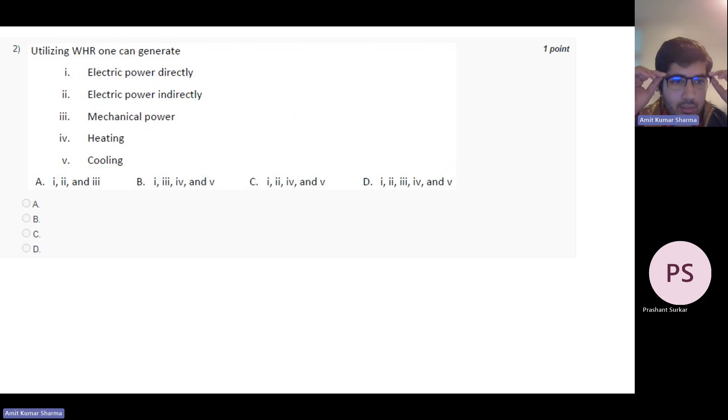Now, utilizing waste heat recovery one can generate - if you are having a waste heat recovery system, we can directly get electric power, or indirectly mechanical power, heating and cooling. So we can do multiple things. For this, first you have to identify what kind of plant you are having and what are the points.

These are like waste streams available - what is the temperature, pressure, and condition, and what will be the effect if you are tapping off some waste heat recovery there, then what will be the effect of that stream on the other process also. So everything you have to analyze, but you can recover all these: electric power, mechanical power, heating and cooling.

So which of the following are the reasons for waste heat generation? There are many: thermodynamic limitation of cycles, since we are limited by the Carnot cycle. Heat transfer limitations also exist. Physical limitations of the equipment like sizing, length, etc. Material properties also matter, so plant layout is important. Characteristics and chemical composition of the exhaust stream are also important, because you have to check if it has any toxic elements or not. These are the points you have to look into.

Which of the following are sources of waste heat? The sources are mainly fossil fuel and nuclear power plants, and hot products in metallurgical processes and chemical industries. Hydropower plant is completely renewable, so that is not a source of waste heat.

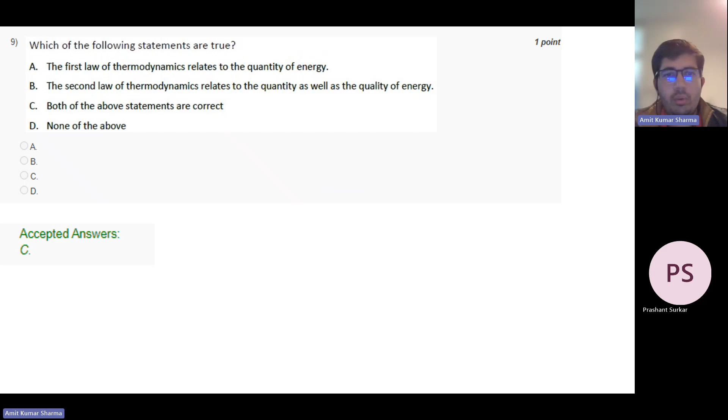In the second law, we talk about entropy, we talk about the quality of energy. Like if you're saying there is around 100 kilowatts of heat available, that heat will not actually generate 100 kilowatts of work. You have to see the exergy, how much of that heat will actually be able to generate work. So here we see the quality, because when you use that heat to generate actual work, due to entropy, most of it will be wasted. So maybe from 100 kilowatts you will only be able to get 20 kilowatts or even less, depending on many parameters like the process and so on.

So exergy is very important. If you want to find the efficiency of a plant, you should go for exergy efficiency, not energy efficiency, because exergy efficiency will tell you the exact details about the plant, since exergy destruction is very important. So try to find the exergy efficiency data for your plant, because energy efficiency will not give you the correct data. Exergy efficiency is very important.

So which of the following are corollaries of the second law of thermodynamics? The first, second, third, fourth, and fifth - all of them. The direction of the process, concept of irreversibility, concept of entropy, and all.

These kinds of numericals may also come in your exam.

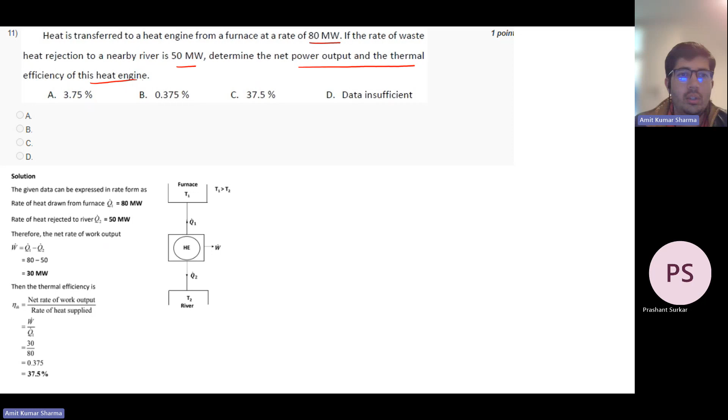So heat is transferred to a heat engine from a furnace at 80 megawatts. If the rate of waste heat rejection to a nearby river is 50 megawatts, determine the net power output and thermal efficiency of the heat engine. Whenever you find a numerical like this, the first thing you should do is try to draw a basic schematic. You can mention T1, T2, and the heat engine, and mark the heat flows and the work done. When you do this, I think you can remember what you have to do with the data. Sometimes it gets confusing, so try to always follow this approach.

Draw a basic schematic, mark all the points, mark all the temperatures, then apply the formulas. Here you can apply T1 for the furnace, T2 for the river, then heat engine developing some work. This is Q1, this is Q2, T1 is greater than T2. So the net rate of work output will be Q1 minus Q2. Q1 is given as 80 megawatt, Q2 is given as 50 megawatt, so 30 megawatt will be the work output. Efficiency is net work output upon rate of heat supplied, so W upon Q1 gives 37.5%. So in this way you can find the answer.

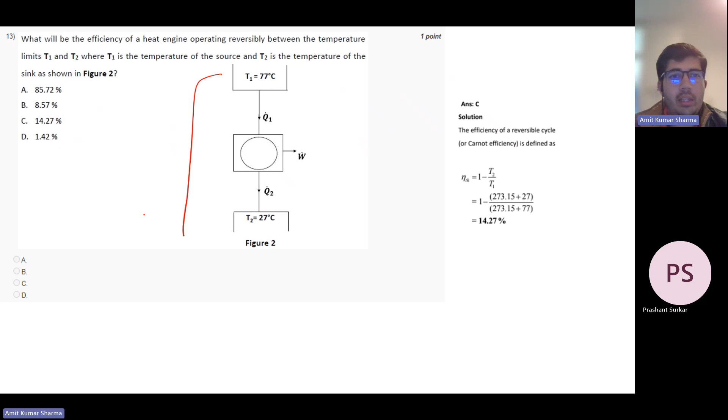This statement is very important: COP of heat pump is always greater than COP of refrigerator, it equals 1 plus COP of refrigerator. So COP of heat pump is desired effect upon work input. So the correct answer is all of the above.

Again a similar question, here we are given efficiency, and the important thing is whenever you have temperature in degree centigrade, when you apply this formula, always put the temperature in Kelvin. This is important, otherwise you will get the wrong answer. Just convert the temperature to Kelvin, then put it in the formula. Temperature should be in Kelvin.

So what are the possible causes of waste heat generation? The economy and energy policies, physical limitation, and minimum allowable temperature of cooling. These are the important points for waste heat generation.

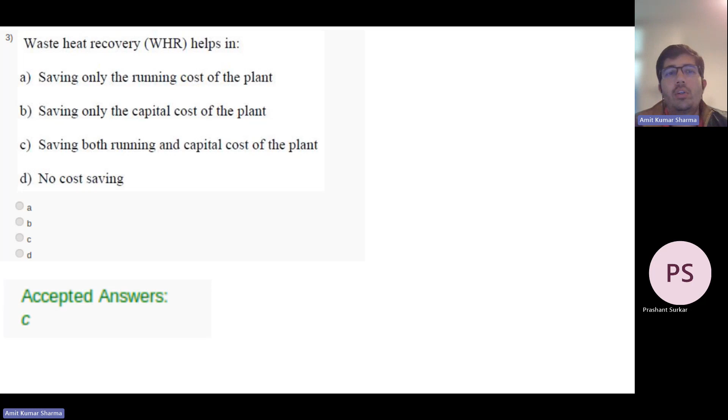Waste heat recovery helps in saving both running and capital cost of the plant. If your plant is already installed, it cannot change the capital cost, but running cost can be reduced in the long term. In the short term, you have to invest something to install a new system for waste heat recovery, but in the long term, there will be saving for sure.

For a cyclic process, the change of thermodynamic property is always zero.

Which one is the correct statement regarding waste heat recovery?

Both quality and quantity of waste heat are important, so you should know the quality and quantity. Quality means temperature, and also pressure. Quantity means the waste stream flow rate - what is the quantity of flow rate. The quality is the temperature. For example, if your waste stream is available at 800 degrees centigrade, and maybe the flow rate is low, but that is having more energy, so that is the quality actually.

To understand more about quality, I think you should cover exergy. There is a Moran Shapiro book, a good thermodynamics book, maybe you are aware of this book. So please try to cover the exergy chapter.

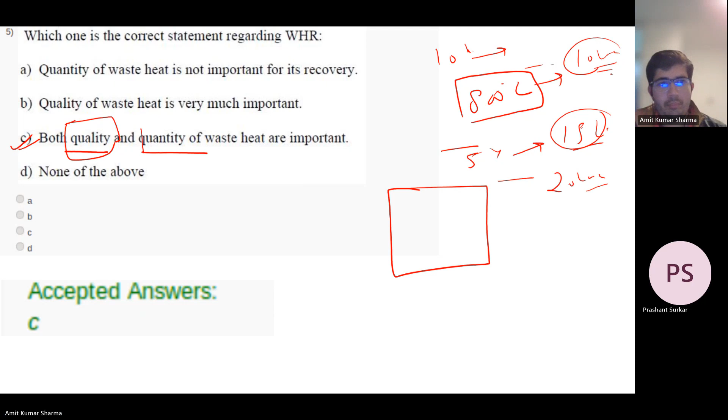So which statements are true for the second law of thermodynamics? It describes the direction of heat flow and introduces the concept of irreversibility. Irreversibility is very important - with the life of equipment, irreversibility increases. If irreversibility increases, the efficiency decreases.

And there is a scope for waste heat - more irreversibility means more waste heat. So you have to find out which equipment has maximum exergy destruction. The main thing you can do is, for an equipment, just read the input properties and after the equipment output properties, and what is the result. With these three data points, you can easily get this from your plant. Just compare the energy at this point, this point, and this point. You can find how much exergy is being destroyed in this equipment, how much loss of energy there is.

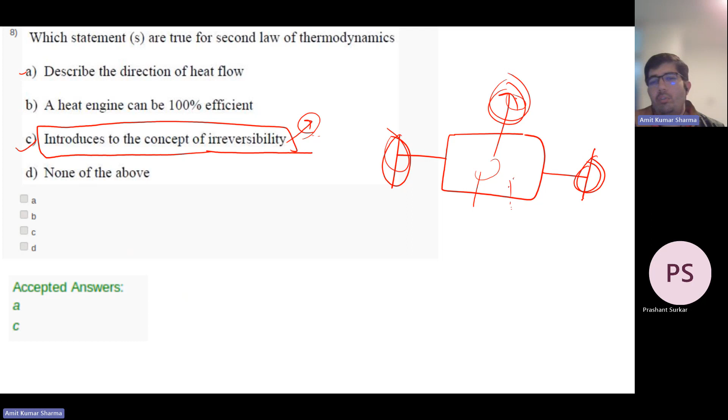The COP is Q2 upon Q1 minus Q2. But by waste heat recovery, one can generate thermal energy of high quality. So these are the possible benefits - if you have waste heat available, you can generate electrical power, you can generate thermal energy of higher quality, and you can also do heating and cooling.

So these are small numericals. You can easily do these with simply the first law of thermodynamics and so on.

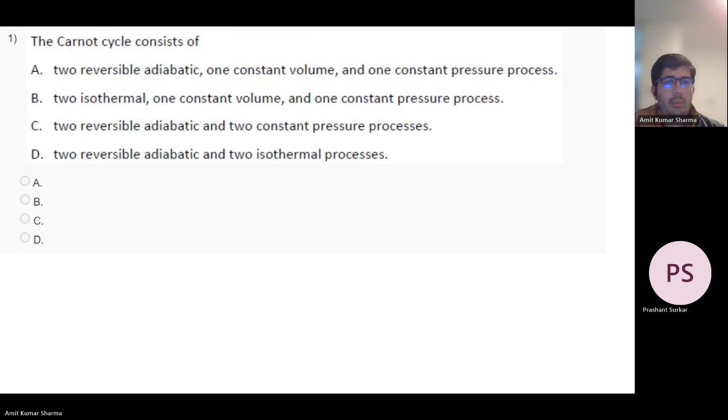The Carnot cycle consists of two reversible adiabatic and two isothermal processes.

So which of the following are causes of irreversibility? Irreversibility can be due to friction, viscosity, mixing, free expansion, and heat transfer across a finite temperature difference. These are the reasons for irreversibility. As the life of any equipment increases, the friction between the parts will increase, so it will cause more irreversibility.

The Clausius statement is del Q by T less than or equal to 0.

So this is the TS diagram. The correct statement for the TS diagram: area 1265 represents the heat added to the cycle. This is the heat addition process - the area under this curve will be the heat added to the cycle.

Similarly, the area 4365 will represent the heat rejected by the cycle, and the area between this will represent the work done. So you can see here - the area below is actually waste heat. This is your waste heat because initially you have added this much heat, but you are only getting output of this much heat. So this heat is wasted.

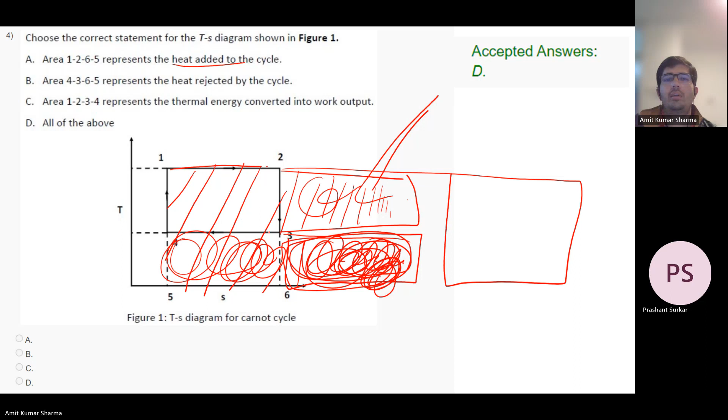So here we have a heat engine between two reservoirs, with temperatures given. The heat engine draws 500 kilojoules from the high temperature reservoir and rejects to the low temperature reservoir. What is the maximum work? Maximum work means you have to apply the Carnot formula - it will be the Carnot efficiency multiplied by the heat added. The efficiency will be 1 minus T lower upon T higher.

Again, temperature should always be in Kelvin, multiplied with the heat added, you'll find the maximum work done.

Again, the same kind of question. So here we are dealing with entropy. Entropy generation is the measure of irreversibility of a process.

As high as the entropy, it means that the process is more irreversible. The entropy balance of heat transfer to the reservoir rate - generation will be source plus sink. So delta S is Q by T. Put the data, find the entropy. Again, the heat transfer to the reservoir will give the entropy generation.

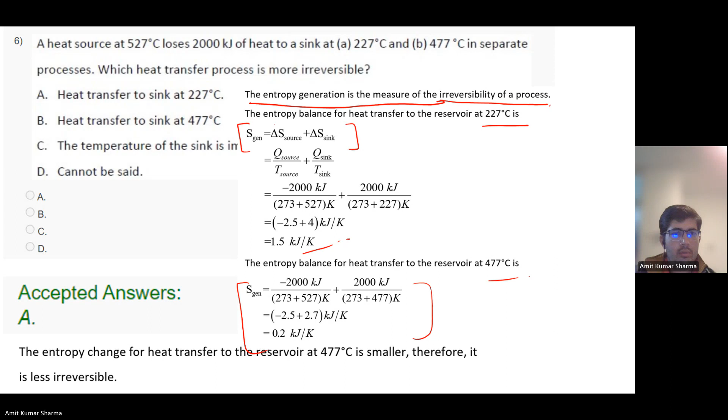So during a reversible process from 1 to 2, the change of entropy will be equal to del Q by T, from 1 to 2, reversible.

An adiabatic vessel contains 2.5 kg of water at 20 degrees centigrade. With a paddle wheel work transfer, the temperature of water is increased to 30 degrees. If the specific heat of water is assumed constant at 4.187 kilojoule per kg Kelvin, find the entropy change of the universe. Whenever dealing with entropy change of universe, it's entropy change of system plus surrounding. The system entropy will be mc ln(T2/T1). You have T2, you have T1, put the data, and this will be the entropy generation for the universe.

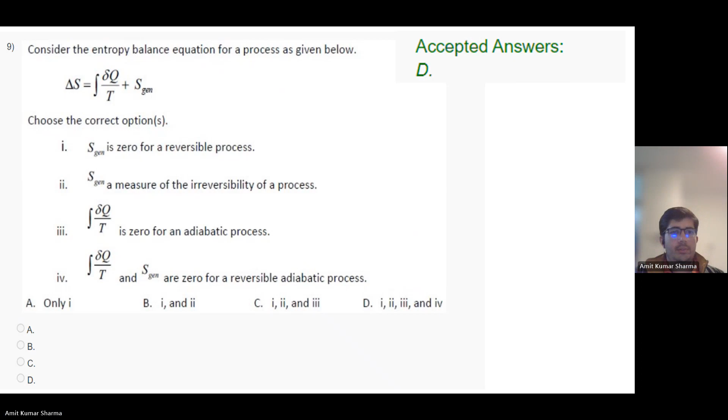Consider the entropy balance equation for a process as given below. Delta S generation is 0 for all reversible processes. If your process is reversible, it means there is no entropy generation, because both initial and final conditions can be regained. If there is entropy generation, it means there will be some losses, and then the process cannot be reversible, because with losses you cannot come back from the final state to the initial state.

S generation is a measure of irreversibility of a process. Del Q by T is 0 for an adiabatic process. And del Q by T and S generation are both 0 for a reversible adiabatic process.

A frictionless piston cylinder device contains a saturated liquid vapor mixture of water at 100 degrees - a constant pressure process. 600 kilojoule of heat is transferred to the surrounding air, with surrounding temperature at 25 degrees centigrade. As a result, part of the water vapor contained in the cylinder condenses. Find the total entropy generation in kilojoule per Kelvin during the heat transfer process.

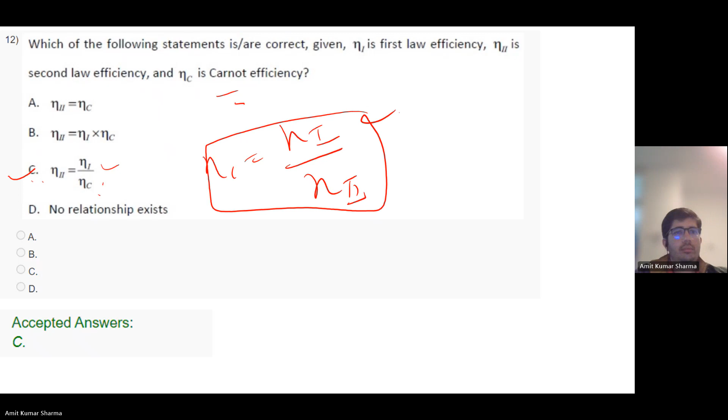Which of the following is true? For work producing devices, second law efficiency equals useful work upon reversible work. And for work absorbing devices, second law efficiency equals reversible work upon useful work. So both statements are correct.

An electric resistance heater for a residential building is claimed to have an efficiency of 100%. Assuming given indoor and outdoor temperatures, find the second law efficiency of the heater. The second law efficiency is given by COP of heat pump upon COP of heat pump reversible. It is claimed that the heater converts all the electric work supplied into heat, so COP of heat pump equals 1. COP of heat pump reversible is given by 1/(1 - TL/TH), which gives 26.7. So the second law efficiency will be COP of heat pump upon COP of heat pump reversible, giving 0.037, or 3.7%.

A waste heat stream in a process industry of 250 kilowatt capacity is available at 400 degrees centigrade. The ambient temperature is 27 degrees centigrade. Find the exergy of the waste heat. Exergy of waste heat is Q(1 - T naught/T1), so 250(1 - T naught/T1) gives 138.55 kilowatt. So if you have waste heat of 250 kilowatt capacity, you can convert only 138.5 kilowatt into work - this is the exergy of waste heat.

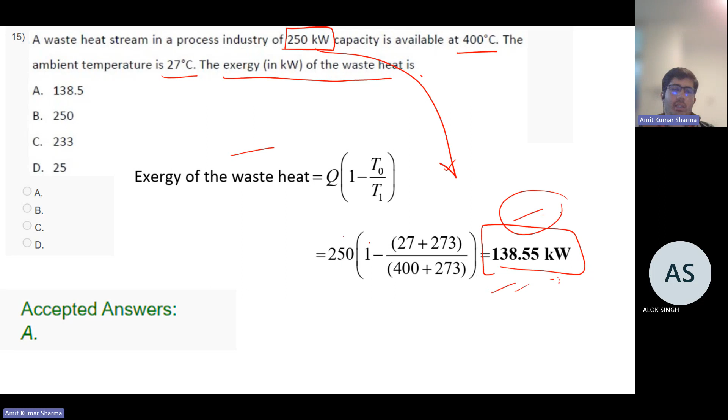Entropy is an extensive property. For a closed system undergoing an irreversible process, the entropy of the system can increase, can decrease, or remain constant, depending on the process.

So what is the correct statement, correct expression for a system undergoing a reversible cycle? So for a reversible cycle, del Q by T should be equal to 0.

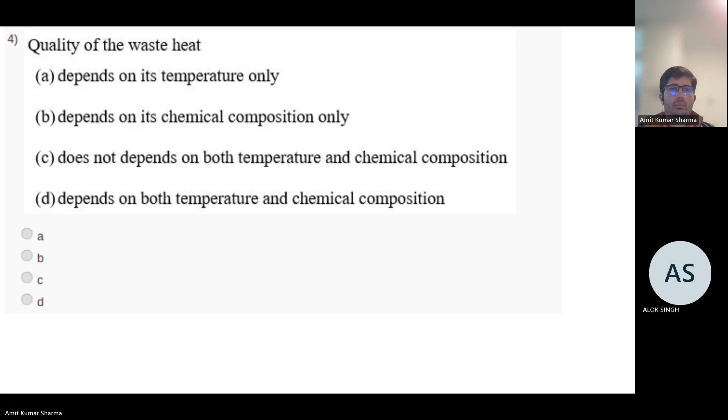Quality of the waste heat depends on both the temperature and chemical composition. As high temperature is more, it means the quality is more.

I think we have students online. Alok? Yes, sir. Hi, so I think you were also in yesterday's class? Yes, sir. Okay.

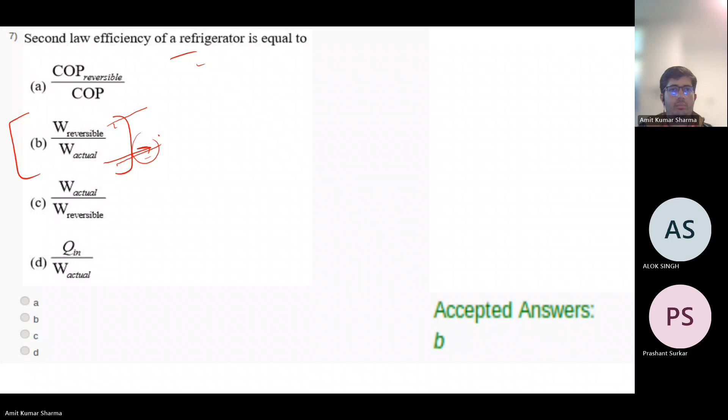Availability of a system during a process, so it destroys due to irreversibility. Availability destroys due to the irreversibility in the system.

So figure of merit of a heat pump is always greater than 1, because the COP of heat pump is 1 plus COP of refrigerator, so it will be always greater than 1.

The correct statement regarding irreversibility. So what are the correct statements? The flow of heat from high temperature to lower temperature can take place without any irreversibility. Yeah, from high temperature you can go easily to lower temperature.

Irreversibility decreases the work done in a heat engine. So if there is any irreversibility, then there will be some losses. It will decrease the work output from the heat engine.

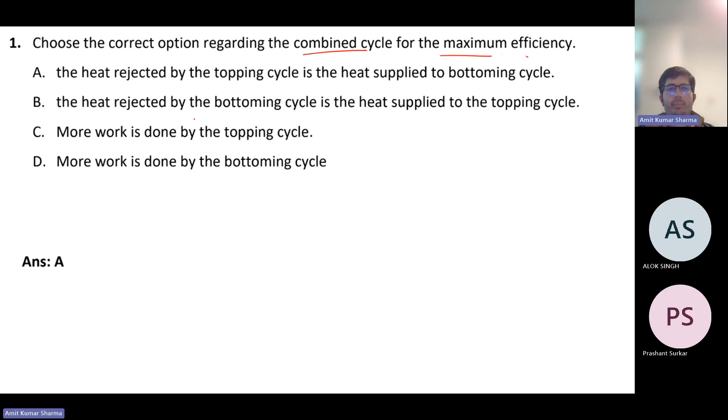So the correct option regarding the combined cycle for maximum efficiency: the heat rejected by the topping cycle is the heat supplied to the bottoming cycle. That is the main point actually. In waste heat recovery, our main objective is to utilize the waste heat from the topping cycle by placing a bottoming cycle. So in the bottoming cycle, we are not adding any extra heat, we are using the heat rejected from the topping cycle as an input to the bottoming cycle. So statement A is correct.

The correct option for thermal efficiency of the cycle is C. The work output will be H1 minus H2, and the heat added, it should be H1 minus H3 - sorry, not D, it's C. H1 minus H3, or actually it should be H4, but H3 to H4 is pump work, which is very less compared to this. So we can directly use H1 to H3 if we have not been given the data for enthalpy point 4. If you have data for point 4, then you should do the calculation correctly, it should be H1 minus H4. But for approximate calculation, we can take heat addition as H1 to H3.

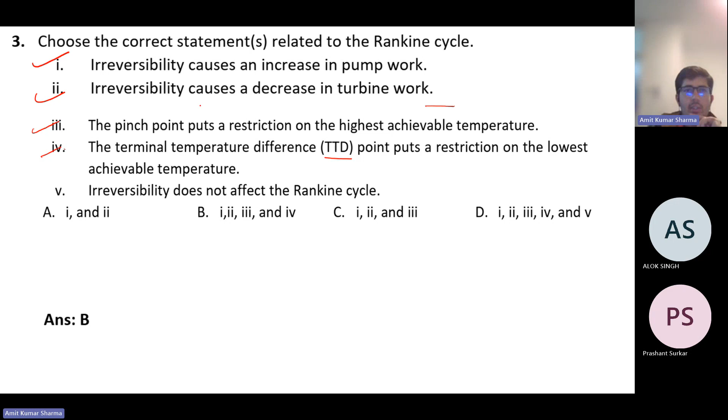So 1 to 2 is the expansion in high pressure turbine. 3 to 4 is low pressure turbine. 2 to 3 will be the reheating, and 3 to 4 will be the expansion in low pressure turbine.

4 to 5 will be the cooling of the exhaust steam in condenser. This 4 to 5 is cooling. And 6 to 1 will be the heating of feed water in the economizer.

Which one is the correct order of fluid flow in a steam power plant? The correct flow is steam turbine, then pump, then boiler - sorry, it will be economizer, evaporator, and superheater. This is the correct order: first economizer, then evaporator, then superheater.

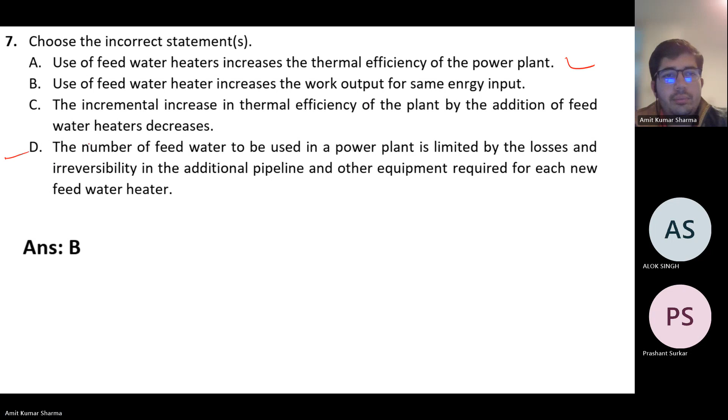Choose the correct statements for reheating in Rankine cycle. It has the benefit of getting high quality steam at condenser inlet, because if we are doing reheating, the input to the condenser will be shifted towards right, meaning you get high quality steam at the condenser inlet. It also increases work output because we are using the high pressure turbine and low pressure turbine, so work output is more.

A numerical where you are given data points and enthalpies. This kind of numerical can also be in your exam, so see it carefully. You have to calculate the pump work, so you need to identify the pump points. Points 5 and 6 will be required for the pump work.

So pump work should be given by WP, specific volume V5 times P6 minus P5. I identify the points: V5 is the specific volume of fluid at condenser outlet. V5 will be at 10 kilopascal pressure, and we are given the specific volume of saturated liquid at 10 kilopascal.

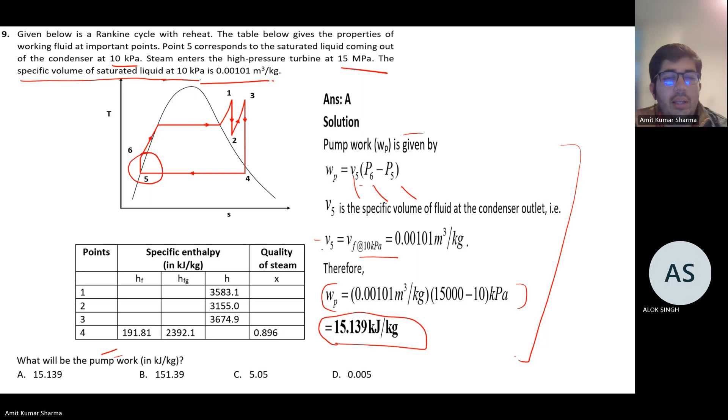The same problem as before - what will be the total heat supplied? So heat supplied will be H1 to H6, and you are also doing reheating H3 to H2 and H1 to H6. So you are supplying heat in the boiler and heat in the reheating. So QS will be H1 minus H6 plus H3 minus H2.

Then specific enthalpy at state 6 will be like this. You have the pump work and you have the enthalpy at point 5, so with this you can find the enthalpy at point 6. Once you know the enthalpy at point 6, the other points are given in the table - just apply the formula. This one, you can have the data.

The same question - what will be the thermal efficiency? Now you have your pump work and the heat input, so the efficiency will be net work output upon heat supplied. We have computed the total heat supplied in the previous problem, so let us calculate the net work output.

It can be WT1 plus WT2 minus WP. We have two turbine works and the pump is consuming power, so it's subtracted. So W net equals H1 minus H2 plus H3 minus H4 minus WP. The specific enthalpy at state 4 can be calculated as HF at 10 kilopascal plus the quality term, because point 4 is not exactly on the saturation curve - it's slightly inside the curve. So you use the enthalpy at point 5, then HFG as the difference, and you use the quality of 0.896.

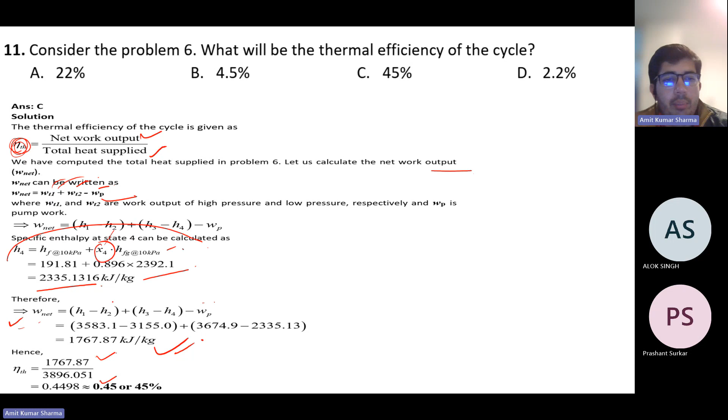Put the data in. Always remember that whenever you are solving this kind of question, be careful with the units, because maybe sometimes it will be in megajoule, this will be in kilojoule, or maybe this can be in kilometer per second or like that. So always remember that whenever you are doing this kind of calculation, be consistent with the units. Units should all be in the same manner.

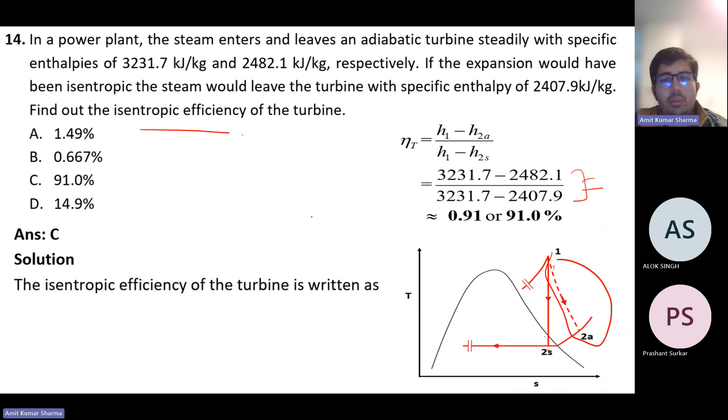So in a power plant, you have to find out the isentropic efficiency. The isentropic efficiency of the turbine will be H1 minus H2A, that is the actual work, upon the isentropic work, which will be H1 minus H2S. Apply the enthalpy of these state points, so it will be 91%.

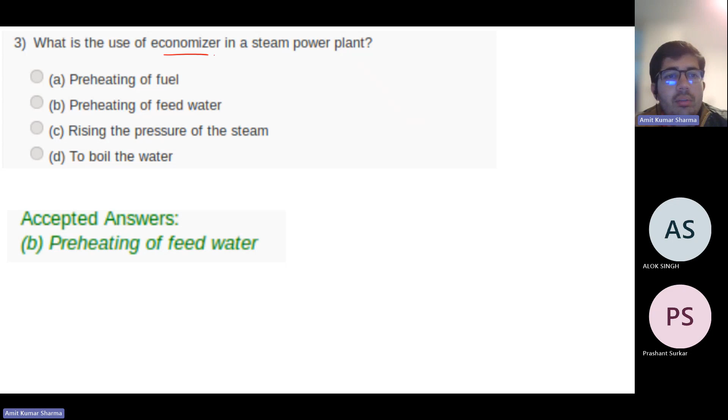So what is the effect of superheated steam in the Rankine cycle? They increase the thermal efficiency, because if the steam is superheated, it means there will be a high temperature, the work output will be more from the turbine, so they will increase the efficiency.

An open feed water heater is a direct contact heat exchanger.

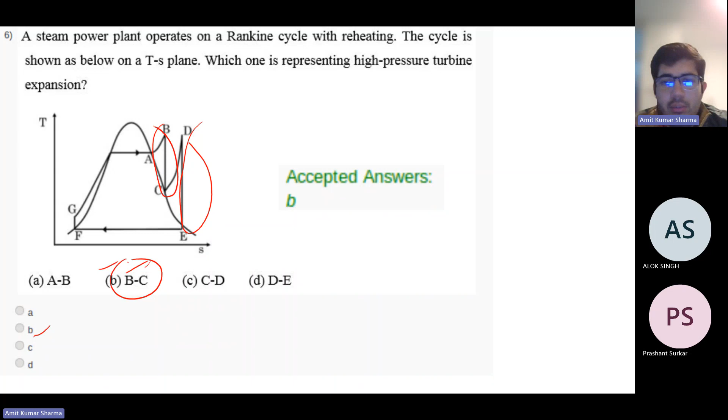In the Rankine cycle, regeneration results in higher efficiency but lower net work output. If you are doing regeneration, then efficiency will be higher but the net work output will be lower.

The pinch point is the difference between the temperature of the flue gases and the inlet of the evaporator.

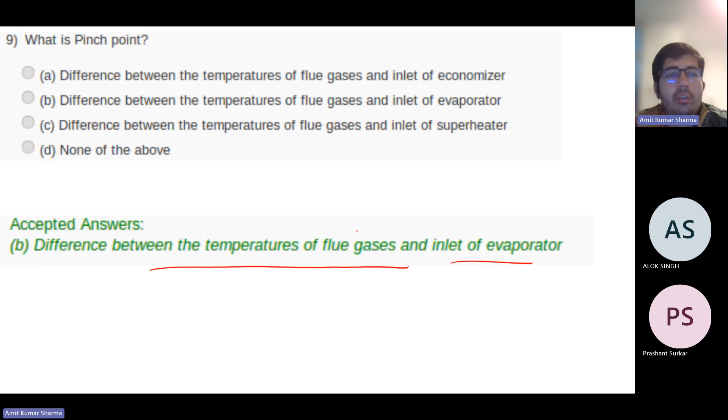Exergy destroyed in the turbine is equal to the difference between the exergy delivered to the turbine by the working fluid and the exergy delivered by the turbine to the shaft. So this is the exergy destroyed. The working fluid has some exergy, and we deliver some exergy in the form of energy through the shaft. The difference of these will be the exergy destroyed, that much amount of energy we are not able to use.

We have already covered it. Which one is true for the ideal Brayton cycle? It is commonly used as a topping cycle, and its efficiency depends on the pressure ratio and type of gas used. So both of these apply to the ideal Brayton cycle: it's commonly used as a topping cycle, and its efficiency depends on the pressure ratio and types of gas used.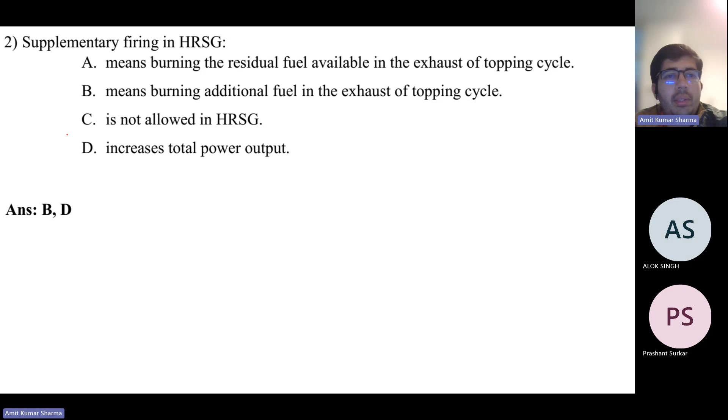Now, supplementary firing in HRSG means burning additional fuel in the exhaust of the topping cycle to increase total power output. It is used for supplementary firing in HRSG. For a gas turbine with maximum temperature T3 and minimum temperature T1, the optimum pressure ratio for maximum net work output is given by...

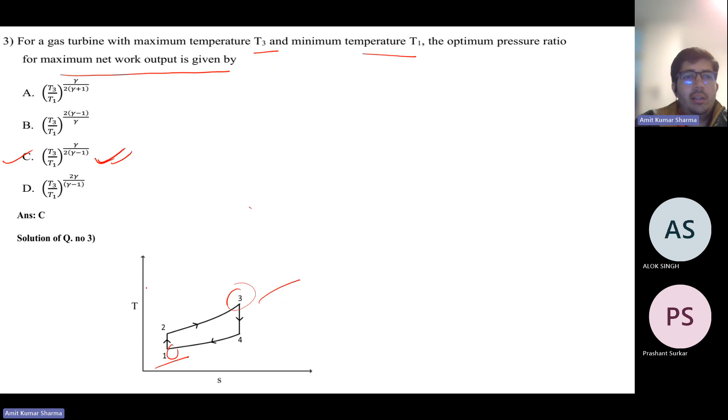It is given by T3 upon T1 to the power gamma upon 2 gamma minus 1. This is the optimum pressure ratio for maximum net work output. This is an important question: the optimum pressure ratio for maximum net work output is T3 upon T1, the maximum temperature to the minimum temperature of the cycle, to the power gamma upon 2 gamma minus 1. This is the complete derivation for this.

The efficiency of the topping and bottoming cycle of a combined cycle power plant are eta 1 and eta 2. Then the correct expression for the efficiency of the combined cycle: we know combined cycle efficiency equals eta 1 plus eta 2 minus eta 1 times eta 2, or we can write 1 minus (1 minus eta 1)(1 minus eta 2). Both statements are the same.

So we have to find out the efficiencies. The Carnot efficiency is 1 minus T minimum upon T maximum. Apply the formula with the given temperatures, and it will be 75%. The Brayton cycle efficiency is 1 minus 1 upon Rp (pressure ratio) to the power gamma minus 1 upon gamma, which gives 0.4. The ratio of Brayton to Carnot efficiency will be 0.53. So this was the answer.

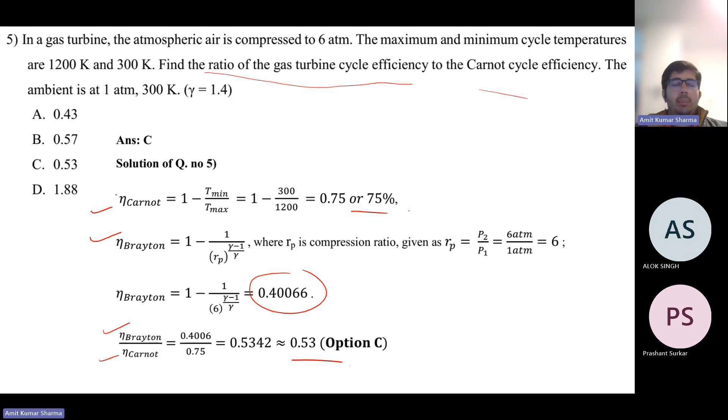Find the ratio of gas turbine efficiency to the Carnot cycle efficiency. So find both of them separately and find the ratio between the two.

By using a combined cycle gas turbine and steam power plant, specific fuel consumption can be decreased, efficiency can be increased, work output can be increased, and the waste heat from the gas turbine or topping cycle is routed to the steam turbine bottoming cycle, which generates extra power.

Okay, then a simple ideal Brayton cycle with air as the working fluid is given.

So we know that for the isentropic process, T2 upon T1 equals pressure ratio to the power gamma minus 1 upon gamma. It's a very strict thermodynamic formula. Apply this.

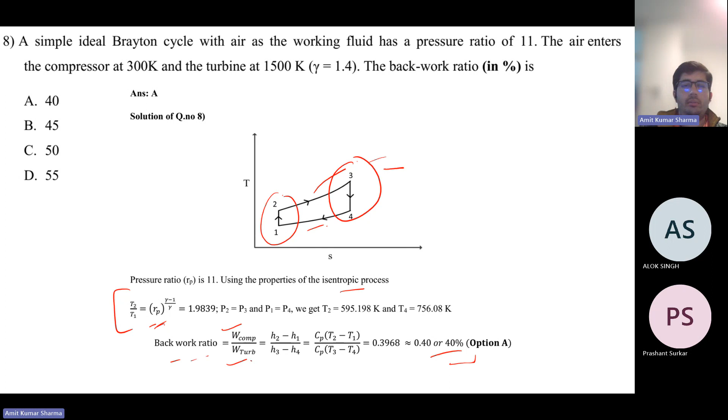So it's quite a long question. Maybe we can go through this later.

So the efficiency of HRSG can be improved using multiple pressure steam generation, low pinch point temperature difference, and low approach point temperature difference. By using these three, we can improve the efficiency.

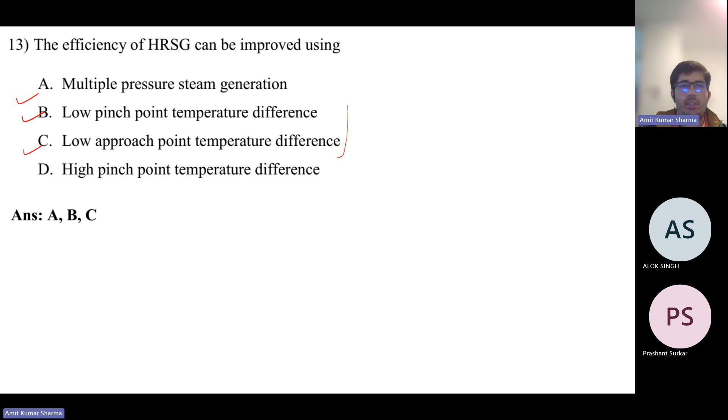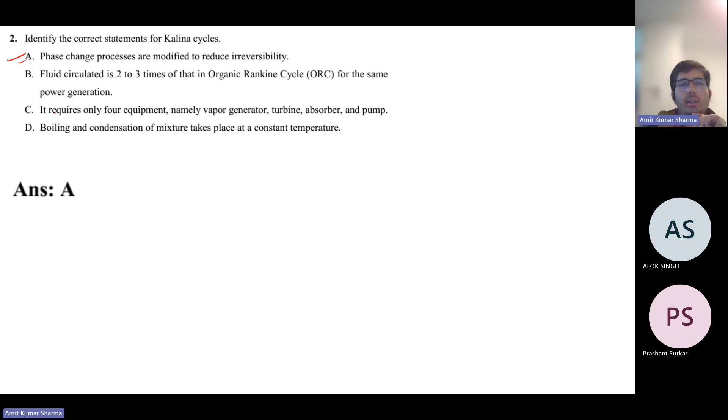So in Kalina cycles, phase change processes are modified to reduce irreversibility. In this case, we can also increase efficiency.

So to improve the heat exchanger between a gas and a liquid stream, it is decided to use fins. Select suitable option. Fins are generally attached on the gas side as heat transfer coefficient on the gas side is small.

That's why fins are generally attached on the gas side.

So what is the correct statement regarding organic Rankine cycle? To avoid liquid condensation during expansion, it requires dry expansion. Low temperature and renewable energy sources can be used for vapor generation, and it can run without superheating of the working fluids. These are some statements regarding organic Rankine cycle.

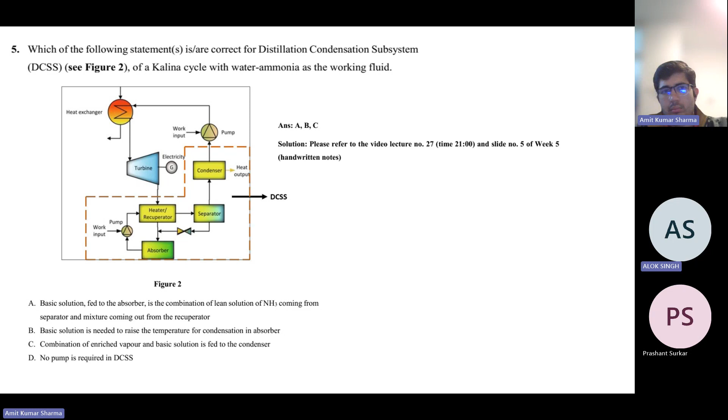And the basic solution needed. Hello sir, in the previous question please. Yeah. Sir, in our assignment solution, it is written that option D is not correct, sir.

Okay, yes sir. Okay, so maybe I have to check that. If it is in the solution now, maybe that will be correct. Maybe because I think this solution is quite old, I have to check this. Okay, slide number 100, so let me mark it. I will check and update the answer in this slide maybe. Okay.

So the statement regarding organic Rankine cycle: it can run without superheating of the working fluid.

I have to check it. Yeah.

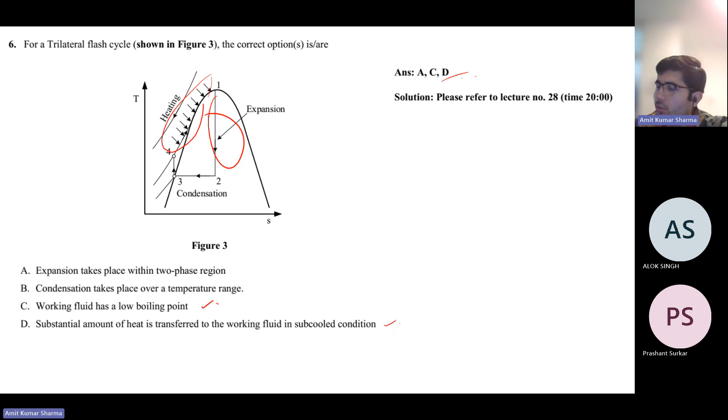The correct expression of NTU, number of transfer units, in a heat exchanger: NTU is UA upon the minimum heat capacity rate.

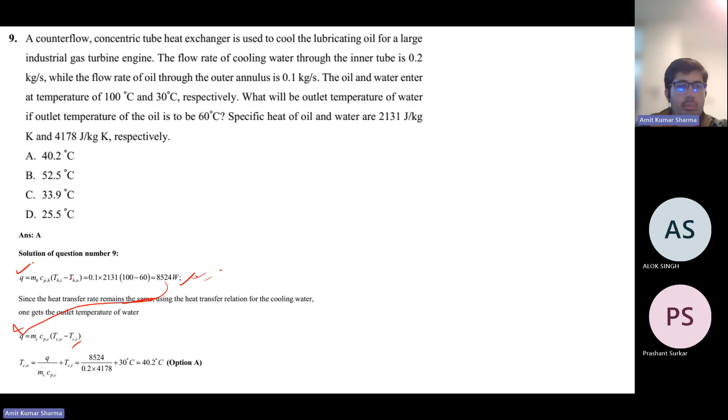So in the previous problem, what is the LMTD of the heat exchanger? LMTD is the temperature difference of terminals upon ln of delta T1 upon delta T2. Put the data in, and this is the answer.

To identify the correct statements regarding the rotary regenerator: it is used only for gas-to-gas heat exchange and it contains a storage matrix. Identify which of the following is true for a regenerator with a rotary hood - it is used as an air preheater and it has a fixed matrix and fixed streams of gases.

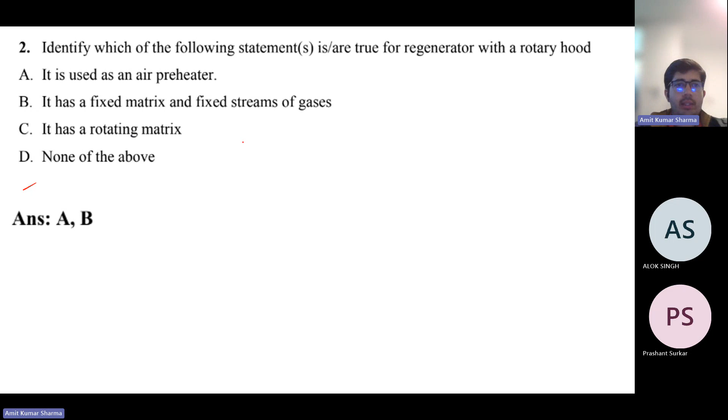Correct statements regarding the run-around coil system: it should be used only when the distance between the hot and cold stream is large. If there is a very large distance, then all of the above apply - it is suitable for heat recovery in air conditioning systems, it consists of two heat exchangers, and it needs extra auxiliary power. This is the run-around coil system, and in these three cases, we can use that.

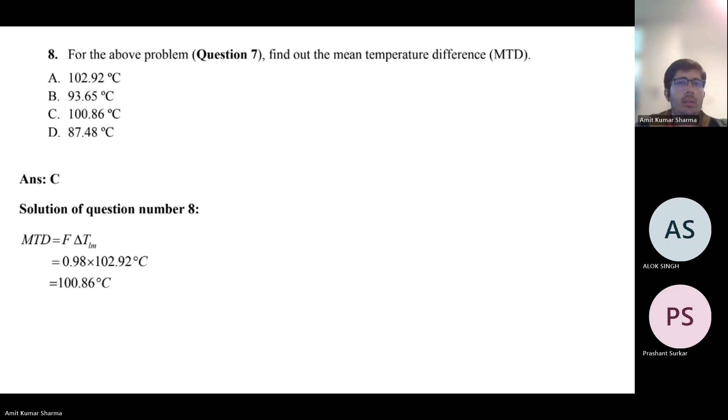We can skip some of these long questions because you have limited time.

So you have to find out the NTU. We have different kinds of formulas for NTU as per the flow arrangement. Try to remember some pattern for these formulas, or sometimes you may have these kinds of tables in your exam also - you can use these kinds of tables as well.

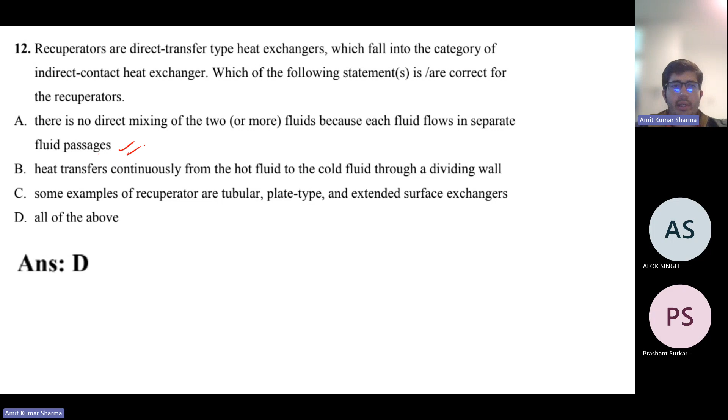Recuperators are direct transfer type heat exchangers which fall into the category of indirect contact heat exchangers. Which of the following statements is or are correct for recuperators? For recuperators, there is no direct mixing of the two fluids because each fluid flows in a separate fluid passage. Heat transfers continuously from the hot fluid to the cold fluid through the dividing wall. Some examples of recuperators are tubular, plate type, and extended surface exchangers. So these are about the recuperators.

Regenerators are storage type exchangers falling into the category of indirect contact heat exchangers. Which of the following statements are correct? The corresponding thermal energy is alternately stored and released by the matrix wall, compact surface area. The compact regenerator usually has a smaller volume and lower weight than an equivalent recuperator. These are the benefits of regenerators.

Which conditions should be satisfied for cold end matching in pinch analysis? The number of hot streams should be lesser than or equal to the number of cold streams, and the heat capacity rate of the hot stream should be lesser than or equal to the heat capacity rate of the cold stream.

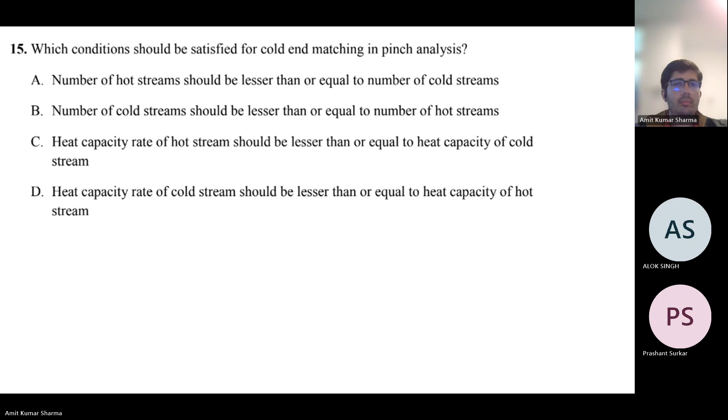Heat pipes transport heat dominantly in one direction. The axial thermal conductivity is very high in heat pipes compared to transversal thermal conductivity. So it's very high axial thermal conductivity, and the dimension of the pipe in the axial direction is much higher compared to the transversal dimension. So can anyone give an example of heat pipes?

In which devices are we using heat pipes? Anyone? Alok, any idea about a heat pipe example, like in which devices are we using heat pipes? Prashant?

We are using heat pipes in our laptops and electronic devices where the space is limited. We don't have so much space for the airflow. The design is also such that the area which requires cooling is not near the vent, so we use heat pipes.

With heat pipes, suppose in our laptop or computer there is a heat pipe here, which goes near the vent. So here we can place a small fan, but the point where we need cooling is here, and in between we are using heat pipes. They have very high axial thermal conductivity, so they pass the heat to the outside. In mobiles there are different kinds of systems, but basically in laptops and many small devices, we use heat pipes.

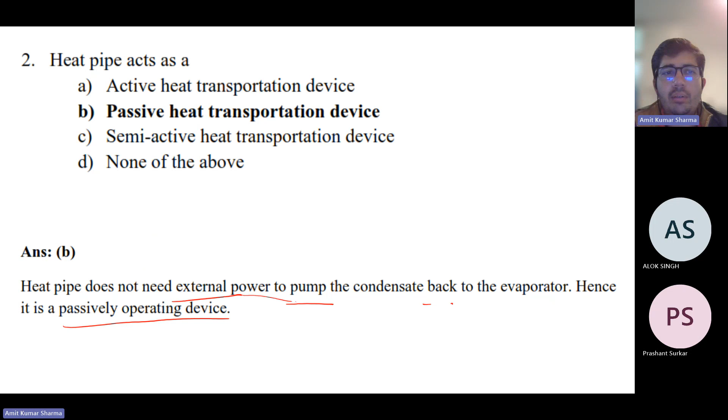A heat pipe acts as a passive heat transportation device. It does not need external power to pump the condensate back to the evaporator. Hence it is a passive operating device, not needing external power.

Which orientation of the heat pipe is preferred to attain maximum performance? Vertical, with the bottom as evaporator and top as condenser, since the pressure difference due to hydrostatic head assists the pumping effect in moving the liquid from condenser to evaporator. The capillary pressure head must be greater than the sum of the liquid pressure drop in the wick, vapor pressure drop, and hydrostatic pressure head.

How does a bend along the length of a heat pipe impact its functioning? A bend in the flow path results in additional pressure drop. With more bends there is more pressure drop, resulting in lower flow rate and power rating, so we try to eliminate the bends.

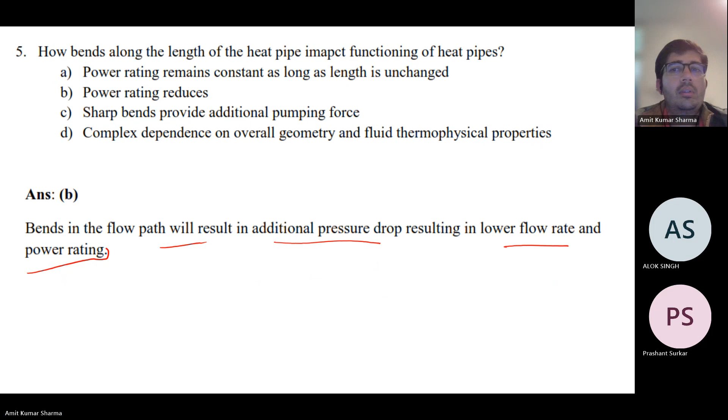Which of the following are features of a vapor chamber? It provides 2D heat dissipation, because in heat pipes there was only 1D heat dissipation. It has a similar working principle as a heat pipe and operates passively in nature. Unlike a heat pipe, the vapor chamber dissipates heat in the planar direction while having a similar working principle.

Which of the following generate power in a thermoelectric generator? In a thermoelectric generator, power is generated due to the temperature gradient at the junction of two dissimilar metals, which results in an EMF due to the Seebeck effect. So the temperature gradient is important, as it can be used to generate power.

I also gave an example about an improved design of a cook stove in which they are using a TEG, a thermoelectric generator. They use the temperature gradient generated in the cook stove, and from this TEG they charge a small battery, which can be used to light a bulb or charge a mobile or other small devices.

In a thermoelectric device, the thermoelectric elements are connected to each other in series according to electrical connection, and in parallel according to thermal connection.

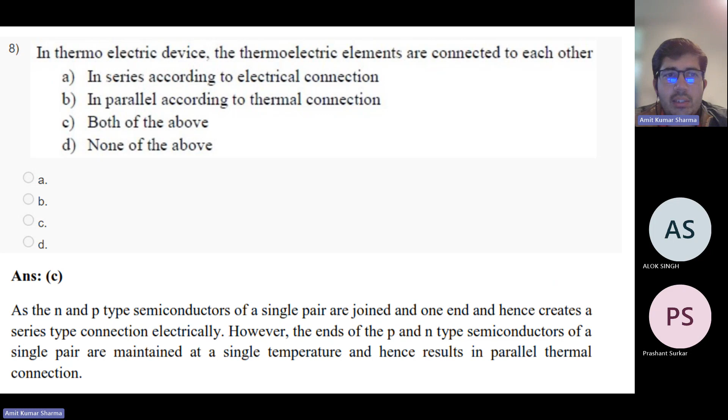The liquid mass flow rate in the heat pipe is given; calculate the axial power rating. HFG is given, so the heat transfer will be Q = m times HFG, which comes out to be 45 watts.

Think some slides repeating. Yeah.

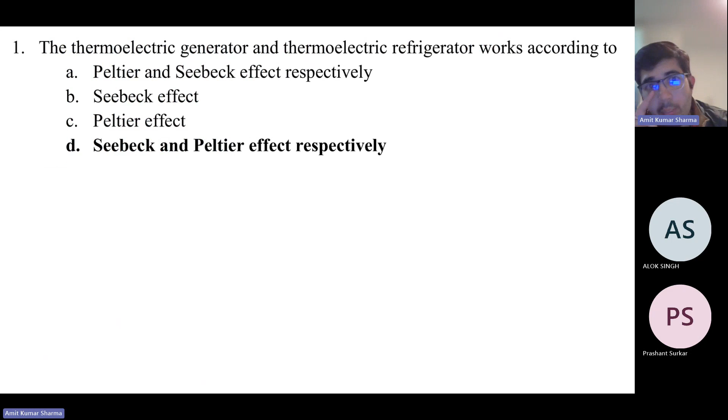The thermoelectric generator and thermoelectric refrigerator work according to the Seebeck effect and Peltier effect respectively. The thermoelectric generator works according to the Seebeck effect, where temperature difference is converted to electrical energy. The thermoelectric refrigerator works according to the Peltier effect, where voltage difference or electric energy is applied to create temperature difference. So here we are applying voltage to create a temperature difference; on the other side, we are using the temperature difference to create voltage.

Figure of merit Z for a TEG is a function of material properties—it depends on thermal conductivity, Seebeck coefficient, and electrical resistivity, which come under material properties. The Z value is hard to increase as it is difficult to get a material with low thermal conductivity and high electrical conductivity.

If Rp and Rn equal 1.5 and 1 ohm respectively, this is the formula for semiconductors: RL equals Rp plus Rn. So the external resistance will be 2.5 ohm, resulting in maximum efficiency.

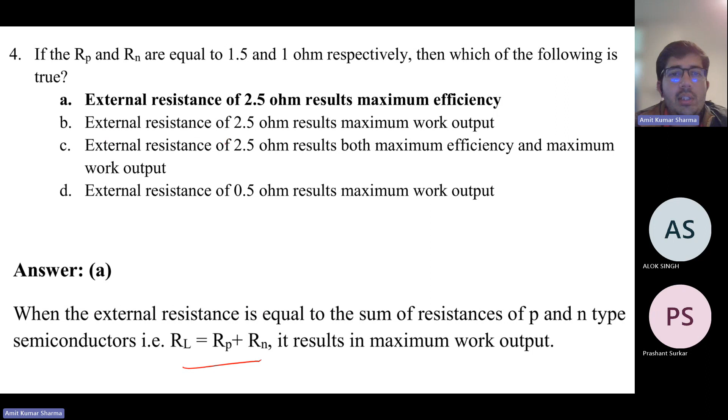The efficiency of MHD is limited by the ionization potential of the gas, and below 2000 Kelvin the gas molecules become neutral. Because the gas ionization potential is critical for release of electrons, the ionization is lost below a temperature of around 2000 Kelvin—okay, it should be around maybe 3000 Kelvin. As electrons combine with ions to form a neutral molecule, this restricts the temperature gradient of operation. So this is the formula for this calculation.

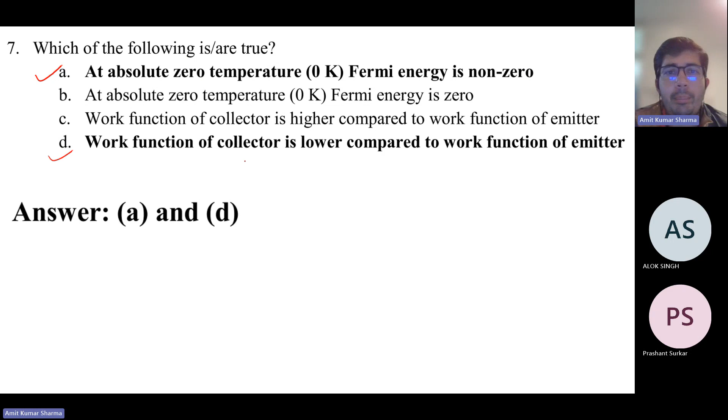Which of the following are true? At absolute zero temperature, Fermi energy is non-zero, and the work function of the collector is lower compared to the work function of the emitter.

In a power plant with hot gas coming from the combustor at 3000 Kelvin, one can use MHD, TPV, and TEG before using the gas in the steam generator. What should be the order? The order should be MHD, TPV, and TEG, because MHD must be used first when the gas temperature is highest—it should be more than 2000 Kelvin, since it loses its ionization potential below 2000 Kelvin.

Thereafter, TPV should be used as the emitter temperature functions above 900 Kelvin. Then TEG does not have any temperature restriction and can work across any temperature gradient, hence it should be used at the last stage.

This is also important whenever you are trying to implement any technology: first you have to understand the technology, what are the conditions for it, and understand the state points of your plant. Based on that, you can decide the technology and the location where it should be implemented.

The combined cycle efficiency will be 1 minus eta C equals 1 minus eta 1 times 1 minus eta 2. So you can find the efficiency with this formula.

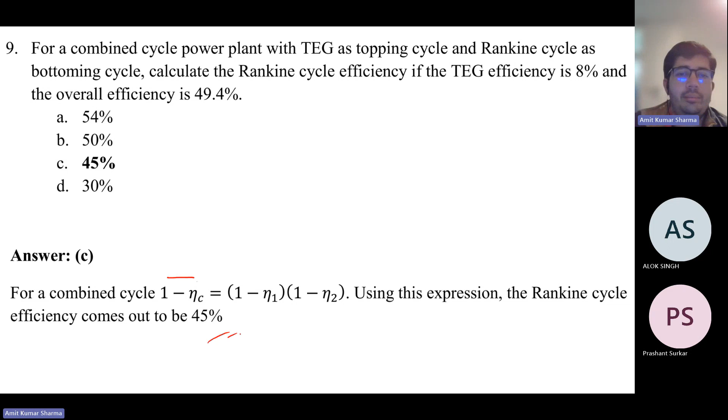COP of heat pump is always greater than 1, because it equals 1 plus COP of refrigerator.

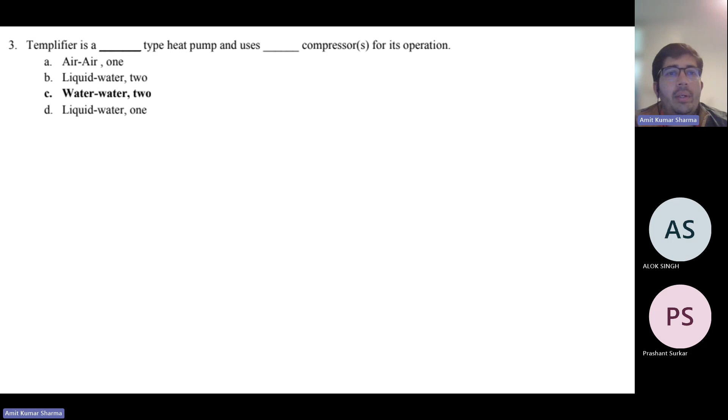Sizing of heat pump depends on air volume and air change requirement, cooling load, and heating requirement. The Templifier is a water-water type heat pump and uses two compressors for its operation—a low pressure and a high pressure compressor.

For an air heat pump used for year-round air conditioning, what is the function of the four-way valve? The four-way switch changes the route of refrigerant, reverting the functioning of the evaporator and condenser, so that the indoor heat exchanger functions as evaporator in summer and condenser in winter for the refrigeration cycle. Similarly, the outdoor heat exchanger becomes the condenser in summer and evaporator in winter.

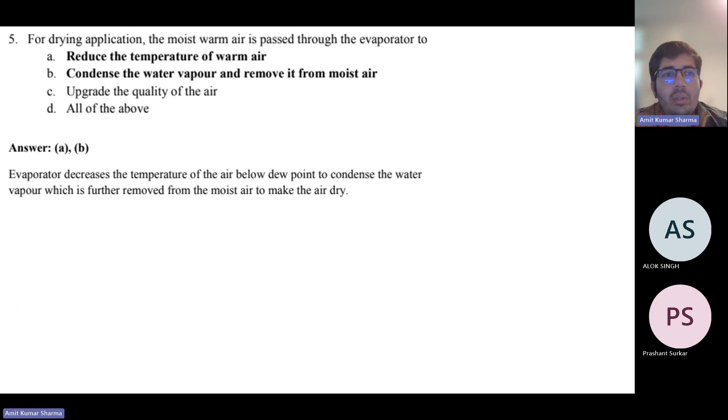For drying applications, warm air is passed through the evaporator to reduce its temperature and to condense the water vapor, removing it from the moist air.

Incinerators are categorized according to the state of waste being incinerated, because there can be different kinds of waste, so as per that we have to categorize it.

In the fume incinerator discussed in class, what is the gas used for the synthesis? It was propane and butane.

We have given some data, based on which we have to find the COP. COP is desired effect upon work input, so that will be 20.2.

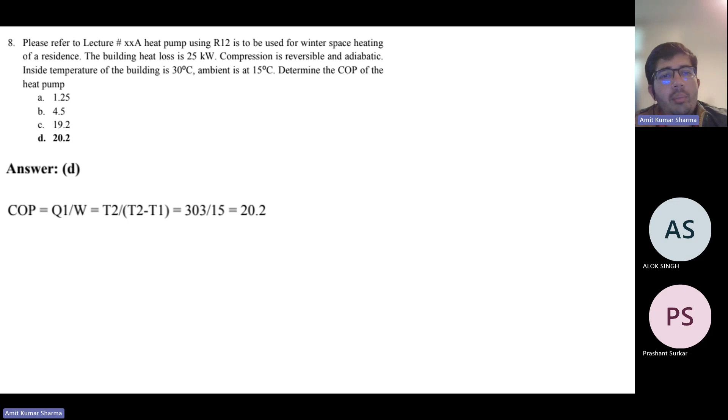For the above heat pump, what is the work done by compressor? So we know the COP, we know the heat added. Based on that, we can find the work input.

So what are the mechanical storage systems? The pumped hydroelectric systems and compressed air energy storage.

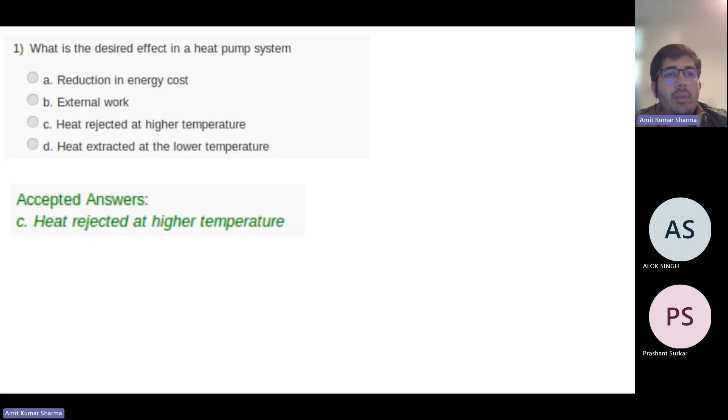What is the desired effect in a heat pump system? Heat rejected at high temperature is the desired effect of a heat pump system. Now the size of a heat pump depends on air volume and air change requirement, cooling load, and heating requirement.

In a winter heat pump, what can be used for the chilled air? It is used in a water cooler, used to cool data centers, and to refrigerate products in a dairy farm.

Now, for an air heat pump used for year-round air conditioning, what is the function of the four-way valve? We have already covered it: reversing the functioning of evaporator and condenser.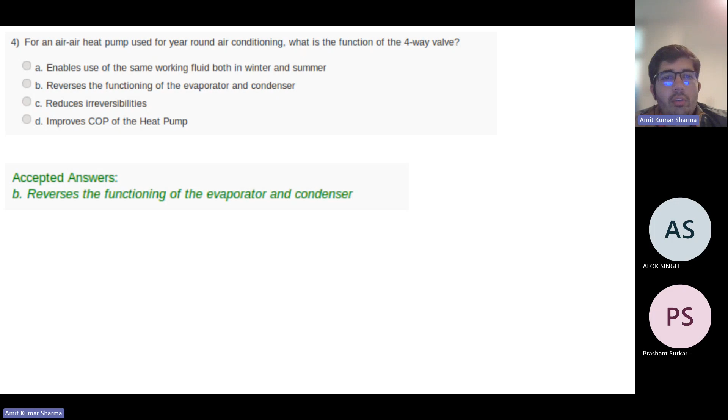So the Templifier unit can improve COP, and it can also handle high temperature lift.

An incineration plant can be used to remove pollutants from gaseous waste, disposal of waste, and process heating. For both these applications, it can be used.

So in the fume incinerator, it was N-butane.

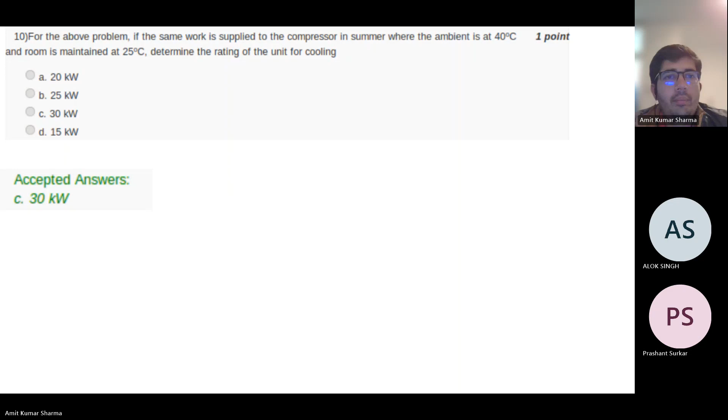So for these numericals, you just apply the basic concepts. You can do these.

The main objective of energy storage is to offset adverse effects of fluctuating demand, assure steady output from existing plants, and meet peak demand on short notice.

What kind of turbine for pumped hydro? It's Francis, because it can also act as a pump to pump liquid back up in off-peak hours. Since we have to pump back the liquid during off-peak hours, it can be used for both turbine and pump.

The compressed air entering the reservoir has high pressure and low temperature, because air pressure is high as it passes through the compressor, and temperature is low after it passes through the heat exchanger before entering the reservoir.

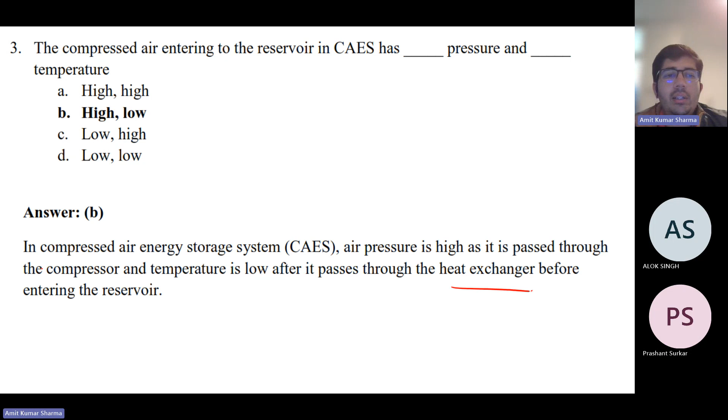So what kind of heat exchanger is used in CAES? It's regenerative.

So energy storage can be found out by M times G times H. You know the stored energy, you know M and G, so you can find out H.

CAES compresses the air and stores energy in the form of potential energy. On the other hand, the flywheel stores energy in the form of kinetic energy.

So which of the following is the correct variation of the current during charging, storage, and discharging state of SMES? It linearly increases, remains constant, and then exponentially decreases.

Okay, so for T2 upon T1, use the basic formula. You can apply this.

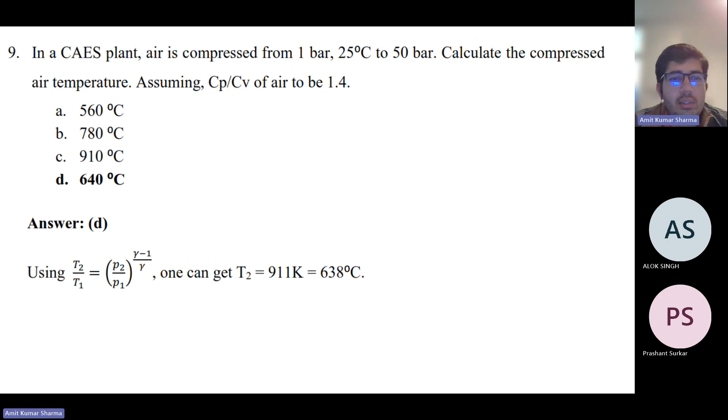So the compressor efficiency is given. Apply the formula for compressor efficiency.

So in a pumped hydro system, which is not a source of loss? Water addition due to rain. Because if water is adding due to rain, then it is not a loss, since it's automatically a natural phenomenon.

Why is the compressed air in the storage system cooled before storage? To reduce storage volume, because we are storing it, and we want to reduce the temperature, since high temperature requires more volume.

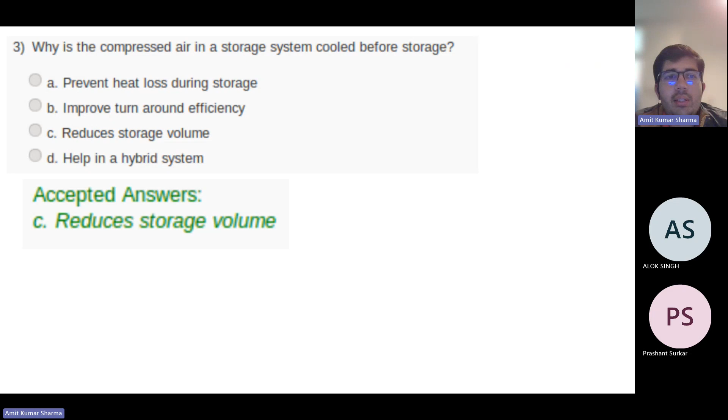In SMES, magnetic energy is converted into electrical energy, magnetic energy can be stored indefinitely, and the electrical resistance of the coil drops to zero.

The flywheel energy storage is increased by locating more mass at the circumference, reducing friction loss, and choosing material with high tensile strength. These are the three things that can be used to store more energy in the flywheel.

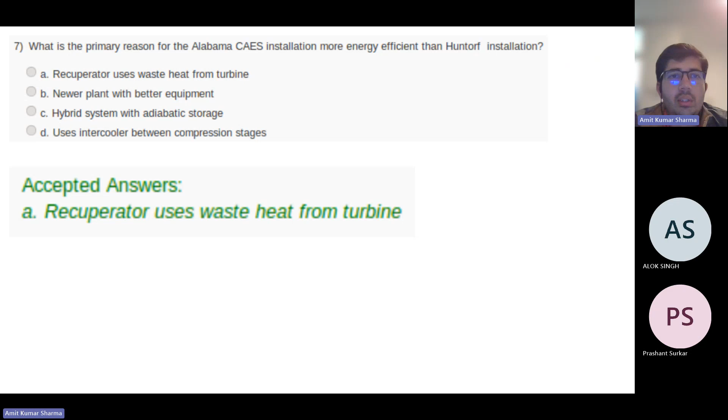So in this, I think recuperators use waste heat from the turbine. This was the reason that the Alabama CAES is more energy efficient than the Huntorf installation.

So apply the flywheel formula that we have discussed. You can calculate the energy stored.

So melting refers to the charging, and solidification refers to the discharging in thermal energy storage using PCM.

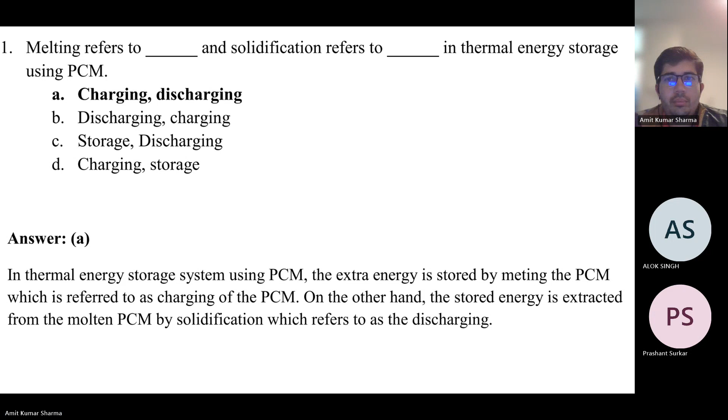So during discharging, concentration of electrolyte decreases in lead acid batteries, and they are bulky in size and self-discharge with time. These are features of the lead acid batteries.

As we are shifting towards the hydrogen economy, what are the challenges of hydrogen as a fuel? It's high storage volume and flammability, because 1 kg of hydrogen equals 11 meter cube, so very low energy density. Storage volume is very high and it is highly flammable.

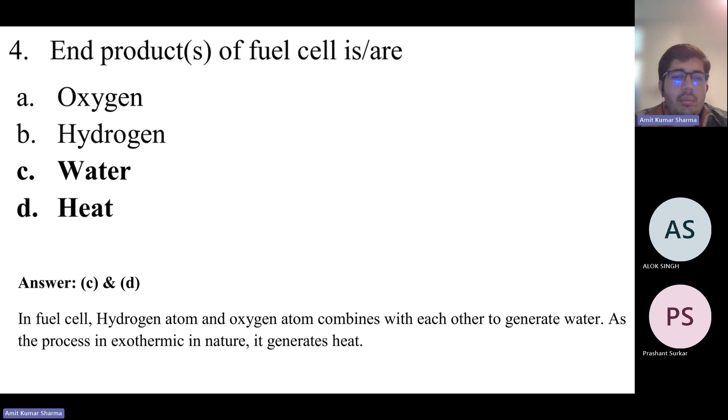End products of the fuel cell are water and heat. So in a fuel cell, the end products are water and heat.

So typical value of thickness of the catalyst layer in PEM fuel cell is 10 micrometer.

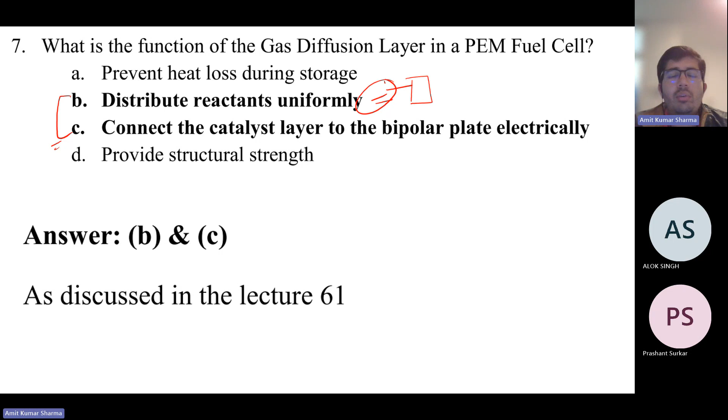What is the function of GDL in PEM fuel cell? So it distributes the reactants uniformly and connects the catalyst layer to the bipolar plate electrically. The distribution is very important because if it is not uniform, then the cell will not work properly and there will be low voltage from the cell, and the efficiency will be low.

Over the years, EROI values of oil are decreasing. We have discussed it here. And the metrics of energy do not consider time value of money. So ROI and payback period are not considering the time value of money. And LCOE and NPV are considering the time value of money.

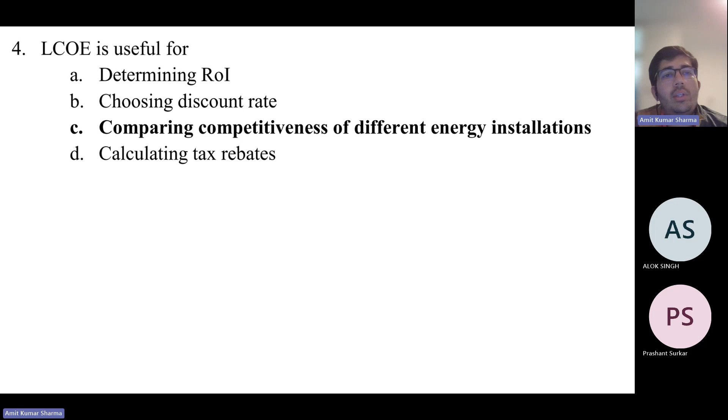So for NPV, for the viable industry in terms of economics, NPV should be greater than 0. LCOE is useful for comparing competitiveness of different energy installations. It is also considering the time value of money, so we can easily compare different kinds of energy installation.

So EROI is energy out upon energy in. Input output analysis was developed by Wassily Leontief.

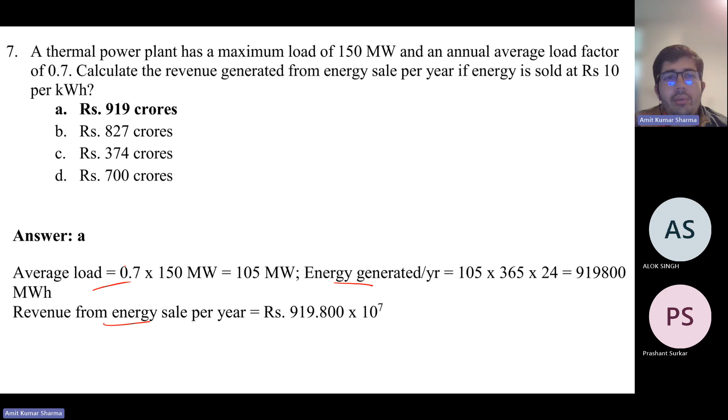Okay, I think we have discussed this numerical yesterday. We have to find out the average load, then generated energy and revenue. Now we have already calculated the revenue, energy and all.

The main thing is in this type of question, be careful with the units, because they will be in megajoule, kilojoule, in crores, lakhs. Be careful with the units like kg and ton. Be careful with the units.

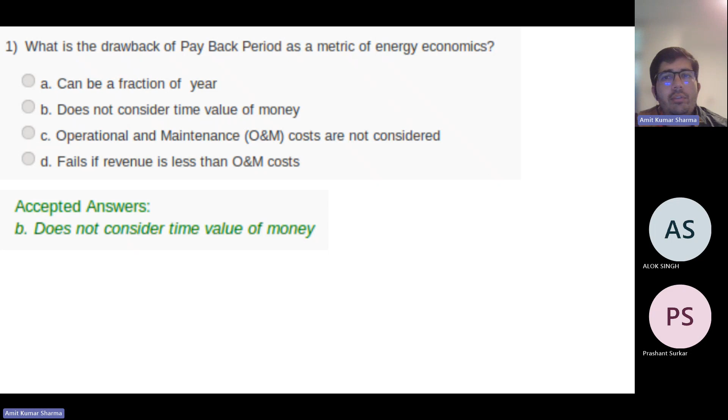So what is the drawback of payback period as a metric of energy economics? It does not consider the time value of money. LCOE is for comparing competitiveness of different energy installations.